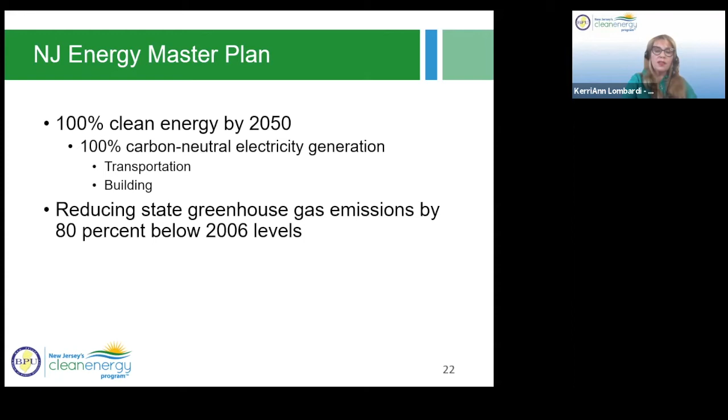So just a bit about the New Jersey Energy Master Plan: it had 7 strategies focusing on transit and building. The goal is to be 100% clean energy by 2050 and reduce state greenhouse gas emissions by 80% below 2006 levels.

And with the new administration, we have a new commitment and ambitious plans for carbon neutrality. President Joe Biden has called climate change an existential threat and has ambitious plans to make the US carbon neutral by 2050.

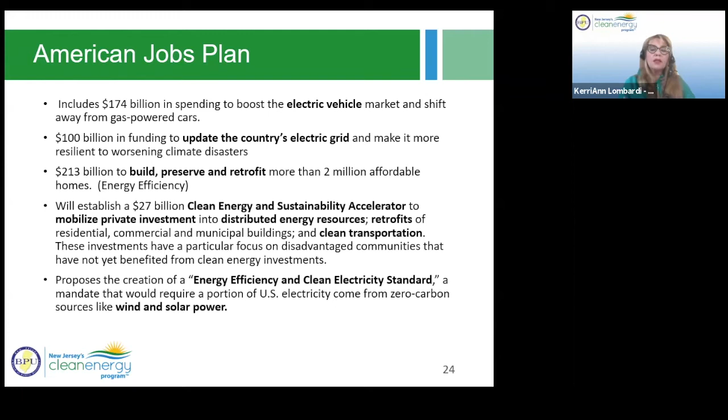We also have the American Jobs Plan. That includes $174 billion in spending to boost the electric vehicle market, $100 billion in funding to update the country's electric grid, $213 billion to build, preserve, and retrofit more than 2 million affordable homes. The American Jobs Plan will also establish a $27 billion clean energy and sustainability accelerator to mobilize private investment into distributed energy resources. So lots of new things coming under the new administration.

There's also the HOPE for HOMES Act and the SAVE Act. These are additional legislative priorities under the Biden administration to aid our energy efficiency improvement goals.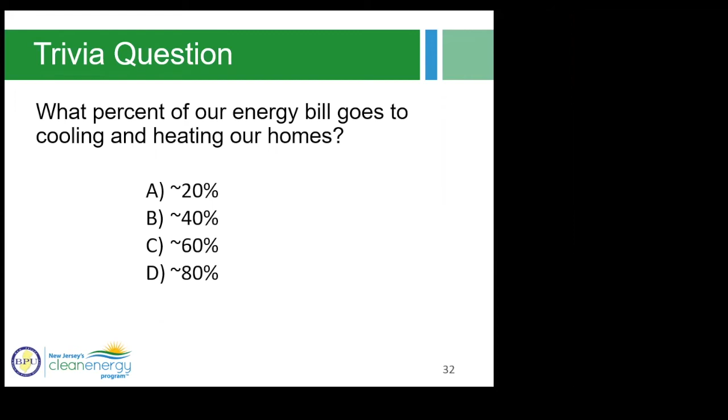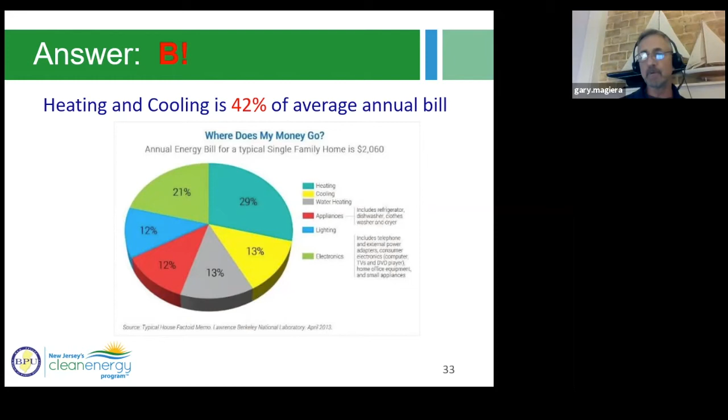Actually, the answer is between B and C. B would be for heating and air conditioning. Now this is not New Jersey, this is nationwide average. C, if you're throwing in domestic hot water, which really should be part of it. So you look at the pie, 29%, 13%, and 13% - that's more than half that pie. If you add 42 to 13, that's 55%. And like I said, that's the average, so you get into extreme north and extreme south, those numbers will go up. But insulation and air sealing - a lot of people talk about insulation.

I was just talking before everyone came on about my friends getting insulation. You get insulation just by itself - insulation doesn't really do anything. It needs to be in a sealed cavity. In an attic, if you don't seal up all the holes underneath the insulation, the air just goes around it. When you go to pick up insulation in your attic, you'll see stains on it. Those stains are actually the air moving through your interior walls in the wintertime. Your house is like a hot air balloon.

And we'll see some pictures in a minute - we'll go to that. But insulation, air sealing, you got drafts. So what do you do? You fix the drafts. The Pink Panther is the pink stuff, the insulation.

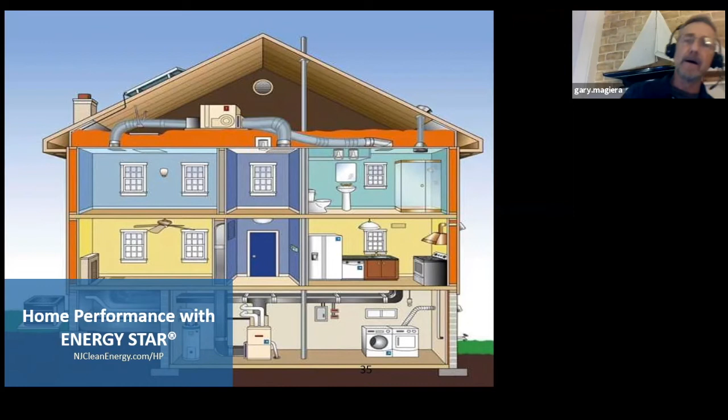Have you been in your attic lately? That's where most of the air is leaking in the house in both summer and winter. So that's a cross section of a house. All those heating ducts, all the penetrations - electrical, plumbing - they're all holes cut in your house. Like I said, up until less than a dozen years ago, most of the new construction in New Jersey, those holes weren't sealed. They just cut holes in the sheetrock, typically much larger than what they needed. Especially plumbers are notorious for that. And air just leaks - so if you don't fix the holes, the air just goes around the insulation.

So getting from here to there, how do we create a clean and sustainable future? We improve the air infiltration on houses. That's a start - that's the cheapest, most economic way to save energy in a home and in commercial buildings too, is to seal up the leaks.

You do that with spray cans - there are professionals in our program that do it. You can go to our website, NJCleanEnergy.com, and find insulation contractors on the home performance list that specialize in this, and there are rebates and incentives for it.

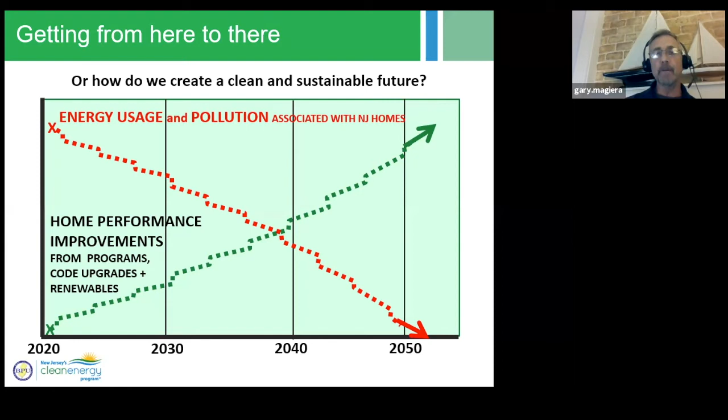That's to start - you air seal, you go around, you pick up the existing insulation and air seal. Typically it's two guys, one day in an attic, put the insulation back. And what they're doing is going for exterior walls and interior partition walls where the sheetrock meets the wood - that's where a majority of your air is leaking, along with the penetrations.

So this is a typical house that doesn't have proper air sealing or insulation. The roof on the left, you can see the snow's melting - could be because of the sun partially, but probably mostly because warm air is moving up through the building from the basement and the first floor into the attic, and it's melting the snow on the roof deck.

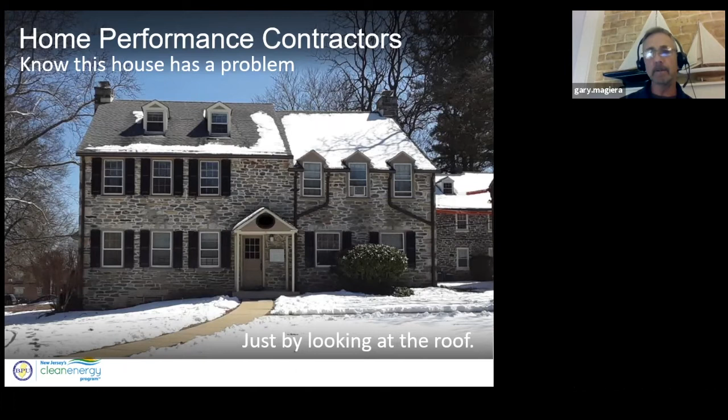So it rises up, comes up through the ceilings below, and condenses in the wintertime. If you have a lot of moisture, it's condensing on the inside of the roof deck and causing mold problems. You'll see a blue powder or white powder sometimes - that's actually mold growing. You should have that checked out.

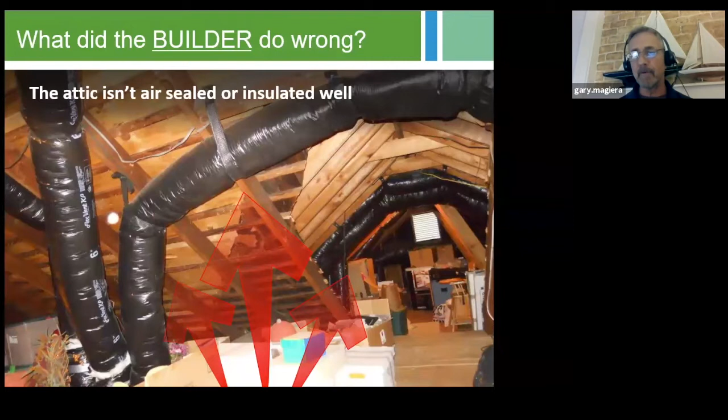My first house was like that. The guy who owned it thought he was doing good - in the wintertime he'd close off the gable vents and seal the attic. Well guess what, he was sealing in all the moisture that was coming up from the first floor. So make sure those vents are open.

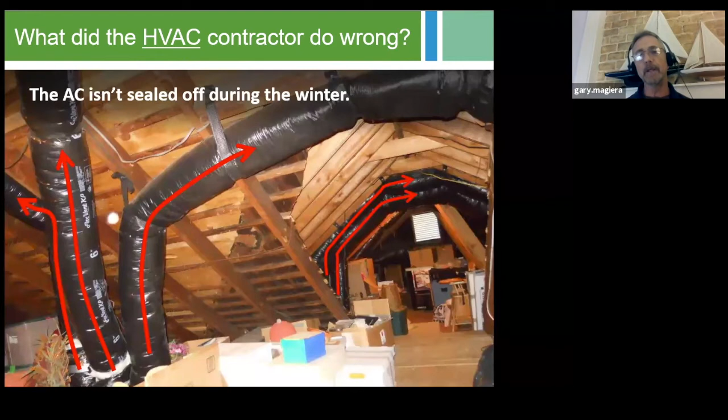Another thing is probably the vents - the ducts are not sealed, which typically up until 3 years ago in new construction you didn't have to seal the ductwork. Now new construction, you need to seal the ductwork when you're building a new home. There's 20, 30, 40% air leakage in a typical air duct system. You have to size your air conditioner, your furnace larger just because you're leaking all the air - it doesn't make any sense. So there's a typical attic showing air leaks.

And so our program contractor, you can get a home assessment done. Some of the contractors will do this. We're going to show a little video here.

In any, I'm going to pause for a second.

The gas utilities offer energy audits at a reduced price. It's subsidized through the program. And when we get into the transition, like Keri Ann was talking about, all the utilities should be offering energy audits. They won't be for free, there will be a reduced cost, like I mentioned. That's the first step, get an energy audit done on your home to do the analysis.

Typically a house that's more than, say, 15-20 years old is a good candidate - a lower efficiency furnace, lower efficiency air conditioner, air leaks, not enough insulation in the attic. Those are typical homes that would qualify for the program, but you need a contractor to come out and give you that analysis first, and then you could have the assessment done. I think New Jersey Natural Gas offers it for like $49 or $59. It's a $500 job for a contractor to come out for 3-4 hours and do an analysis on your house.

So take advantage of that, find out how leaky your house is, and they'll make recommendations, and then you can take it from there. There's a list of contractors on our website. There's about, Keri Ann, what is it, about 90? We have about 90 home performance contractors in our program.

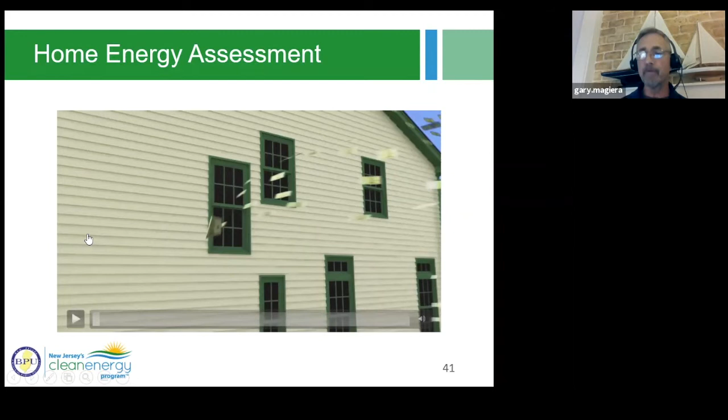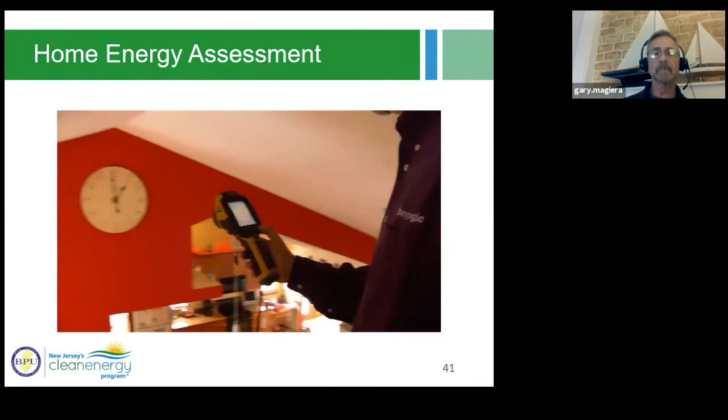A leaky home costs money. How do you stop it? It starts with a comprehensive home energy checkup - a series of tests and inspections to find out where your house could be more efficient. The end goal is to save energy, save money, and make your house more comfortable. Installing energy-efficient lighting and appliances will help, so will creating a sealed barrier around your house, kind of like putting a blanket around the outside, minimizing the leaks. Upgrading your home to save energy can put anywhere from 5 to 30% of your energy bill back in your pocket.

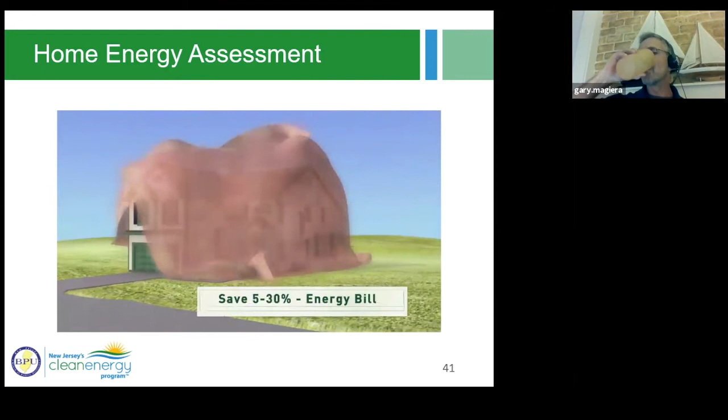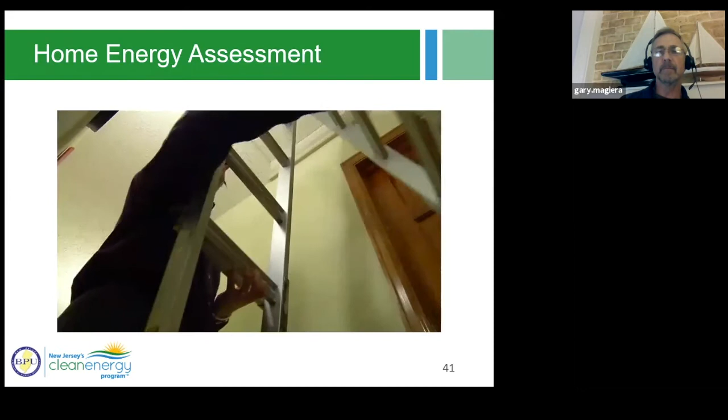To get a thorough home energy checkup, you'll need some help from a professional. Look for a home energy technician called an auditor in your area. In this cold weather evaluation, the auditor starts on the outside, looking for problems around walls, joints, and under the eaves. If there's not a tight fit, you're losing energy and money. Next, the technician might head up to your attic to check for leaks on the top of your home barrier. That trap door could be a culprit, letting cold air pass into the house.

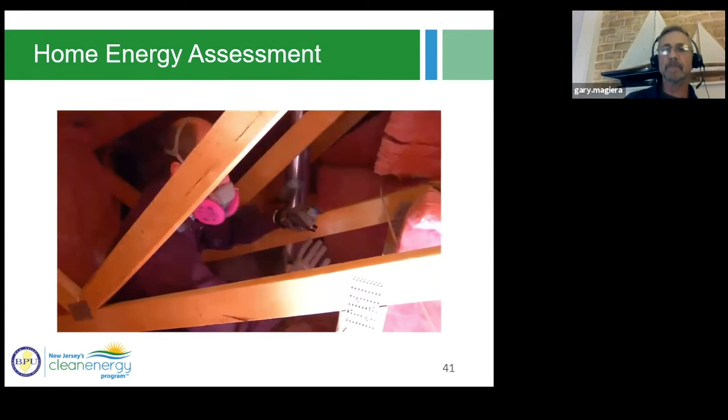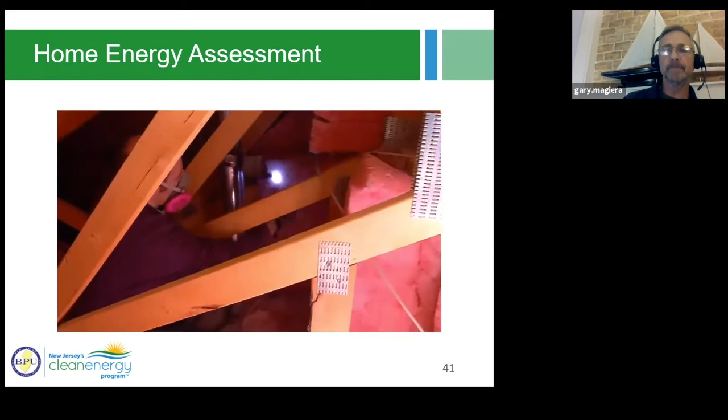A big part of the checkup is determining how well the insulation insulates. Insulation should be correctly installed in between all areas of the house frame. That means it needs to be evenly applied and not just jammed into spaces. And of course, if the insulation has fallen down, it's not working. Your energy auditor will inspect the holes where electrical lines pass through. If they're not sealed, they're leaking.

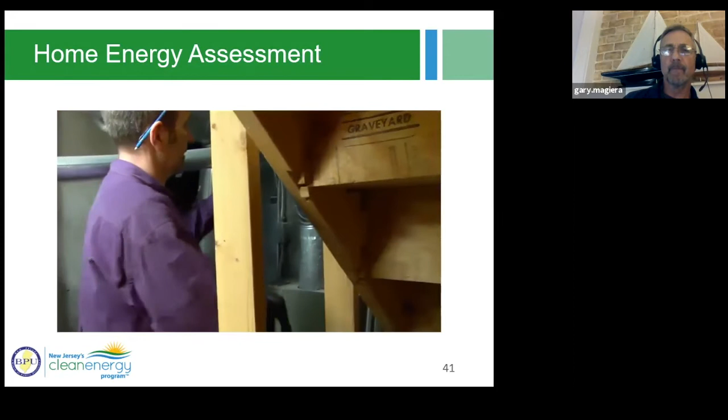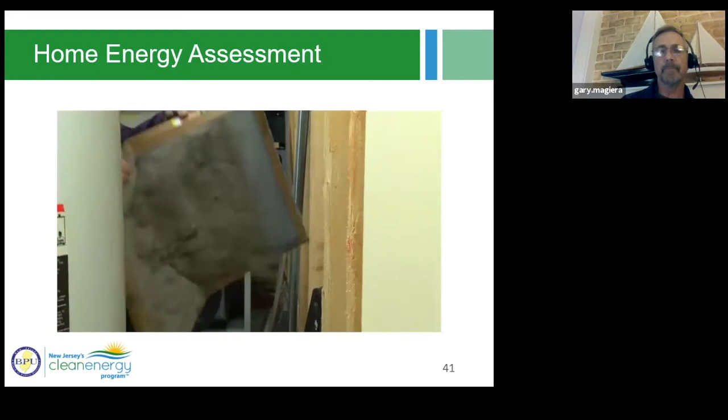Then it's down to the basement. Your furnace and water heater could be wasting energy. The auditor will check to see how energy efficient the furnace is. Furnaces generally lose efficiency as they get older, and it could cost you more to keep yours running than to replace it with a new one. Maybe all you need is a new filter. Some people haven't changed their filter for months, even years. That gunk clogging the filter means your furnace has to work harder to heat your home.

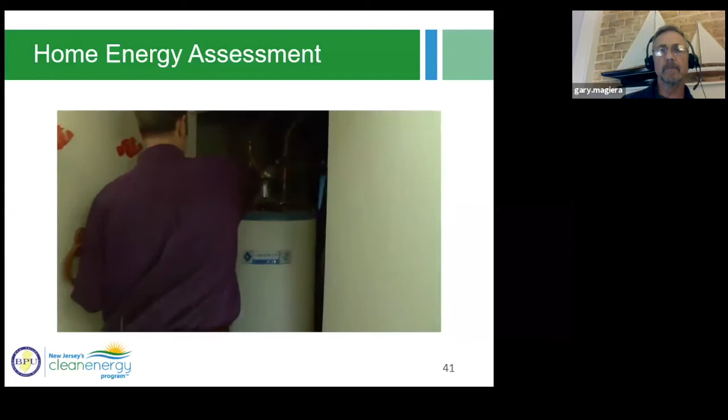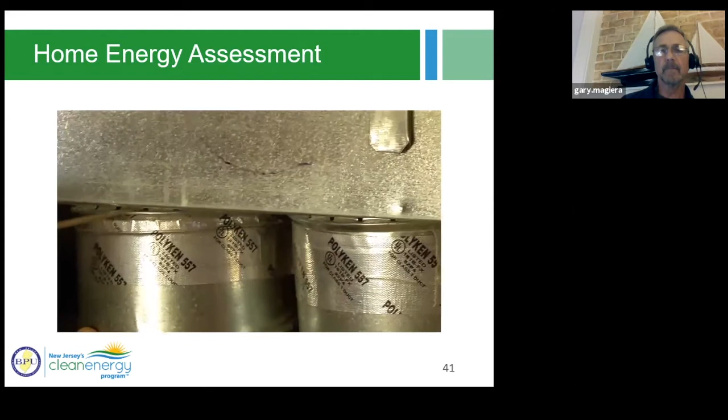If the water heater is several years old, it may not be efficient, and if it isn't insulated, it's also losing energy. Now it's on to the ductwork. The technician will inspect connections to make sure they make a tight fit. They have to be sealed to keep the warm air going where it's supposed to go. If the screwdriver can go in the hole, it means one thing for sure: money is going out.

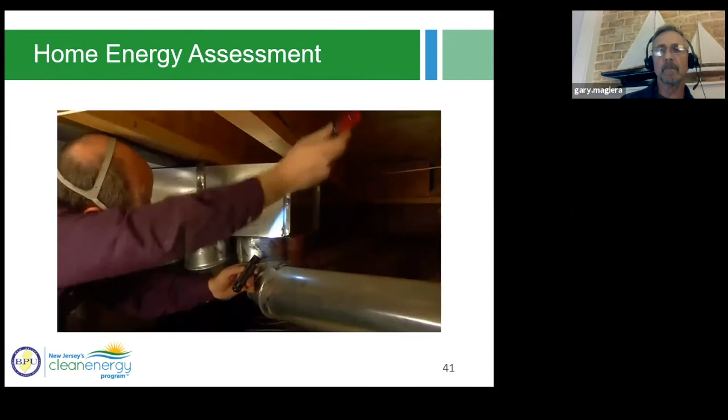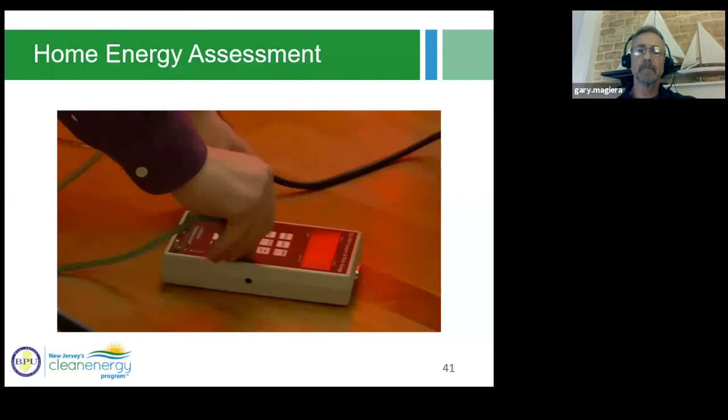Now for the blower door test. The energy auditor will close all the windows and doors and anything else that lets outside air in. This special fan will depressurize the home. The idea is to suck air out of the house, allowing outside air to rush into the home through all those openings you didn't know about.

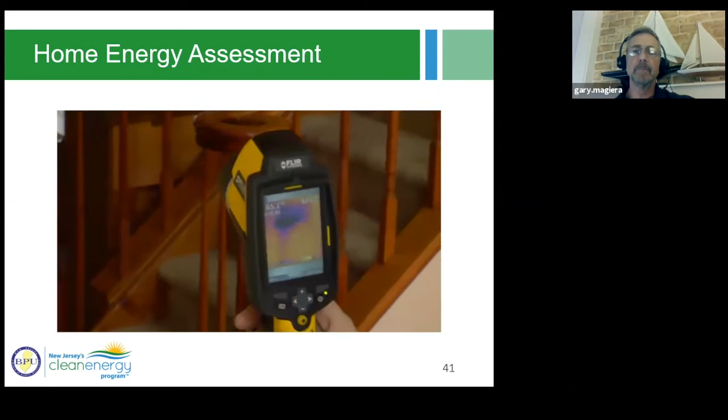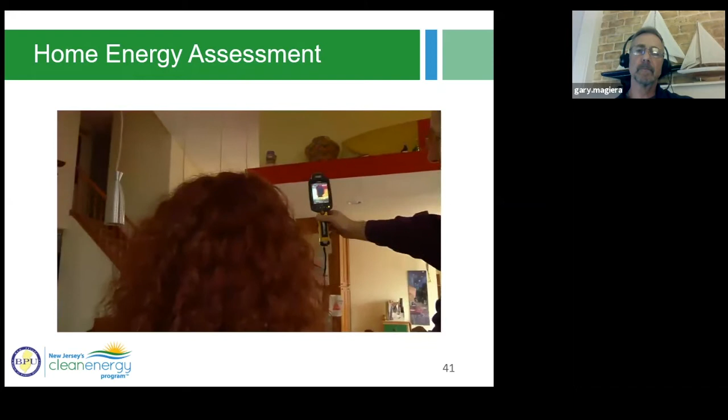With the windows and doors closed and the fan running, leaks are easy to spot with an infrared camera. In winter, the auditor will scan the interior of the home looking for cold air rushing in. Here, the darker the color, the worse it is. These black spots mean one big air leak. It's an eye-opening experience. For this house, the recessed lighting fixtures are big problems. The auditor will also take a look at the kinds of light bulbs in those fixtures. If they're incandescents, they're using a lot of energy. Warm, compact fluorescents are an energy-saving alternative.

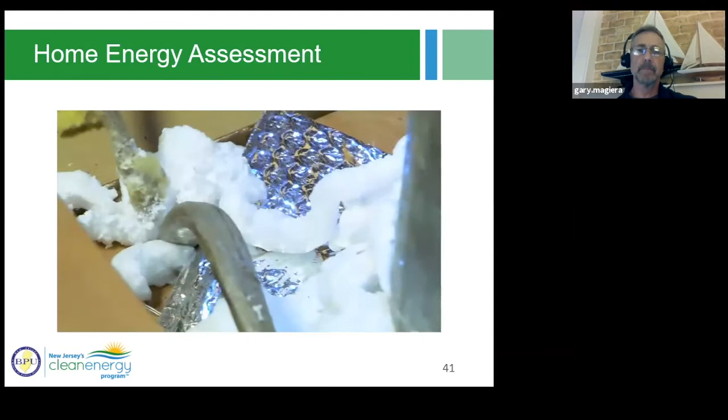So the home energy assessment reveals ways that energy escapes your home, costing you money. The good news is, you'll have a comprehensive home energy report showing which efficiency upgrades are right for you and where to stop those pesky leaks.

All right, so the actual punchline I never got to about solar was, you want to reduce the amount of energy the building's using. So instead of needing 20 panels on the roof, you could possibly get away with 15 or 16. The solar guy may not like to hear that, but it's the truth.

Not only that, you're just wasting it. One of my neighbors is like that. He's got a hot tub, he's got all these things going on, and I told him, have your house sealed up. He thinks it's great because he's got panels on the roof, but I told him you can be sending more electric back into the grid and getting paid for it if your house uses less energy. So it's just common sense.

And the rebates are tremendous, probably the largest in the nation. A lot of contractors complain about the program, but then I tell them, go to another state, you'll get almost nothing. New Jersey offers a lot of money, rebates and interest-free loans. We'll talk about that in a minute.

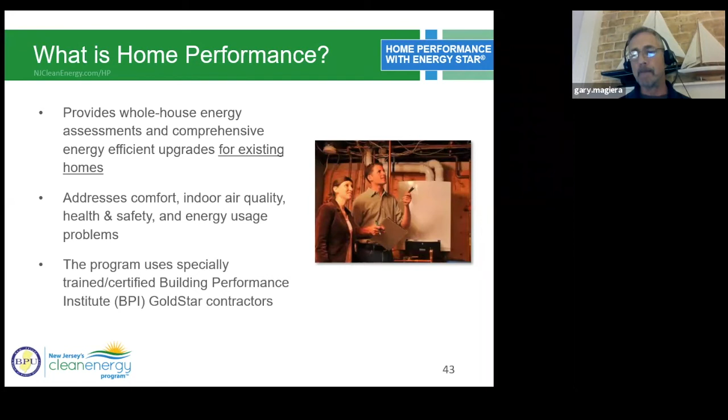So some of the benefits, as we talked about a little at the start, when you're sealing up your house, you're reducing the amount of dust and allergens. You're eliminating the stuff that comes up through your basement and crawl space - maybe not totally, but you're slowing it down. In older homes, you'll typically never stop the air from coming in, and you need fresh air. So what these guys do, the contractors test the house.

They do an air infiltration test, like you saw in the video, before the job starts. They do the air sealing and insulation, and then come back at the end and do another air infiltration test to show the reduction in air leaking into the house. They're also checking to make sure there's enough fresh air coming in - there's a code for that, I think it's 0.35 air changes per hour.

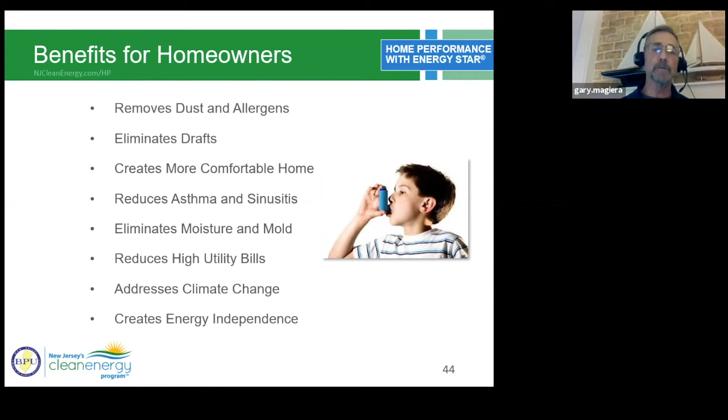The only time I've seen an older home get too tight is when the contractor is using spray foam, and typically that's when you're ripping off the sheetrock and basically gutting the house.

So it's going to make your house more comfortable, with more even temperatures room to room. You're going to size your furnace and air conditioner properly. Most people don't realize most furnaces and air conditioners are oversized. I've been in thousands of houses and done Manual J calculations, and you'd be amazed - you go from a 100,000 BTU furnace put in 1978 to a 40,000 BTU furnace that's 95-98% efficient, multi-stage, very quiet, with an ECM variable speed motor that uses very little electricity compared to a standard motor.

The results are amazing, and when I first started getting into it, it was hard to believe you can actually reduce the size of the equipment. It's all done on computer software now, not on a piece of paper like in the old days - rule of thumb, they wouldn't even measure a house. They'd say, oh yeah, I did a house down the street and it was a 3-ton, 100,000 BTUs.

You've got to do the calculations. It's actually code now when you replace equipment in the state of New Jersey - it's not like-for-like anymore. Just because you had a 100,000 BTU furnace 30 years ago doesn't mean you need a 100,000 BTU furnace now.

The contractor's got to measure the house, run it through the calculations, see how much insulation you have, what type of windows. A lot of houses' windows have been upgraded, more insulation has been added, and the air duct system has been sealed up, so the house is using less energy. And like I said, most systems are oversized to begin with, and they don't run properly.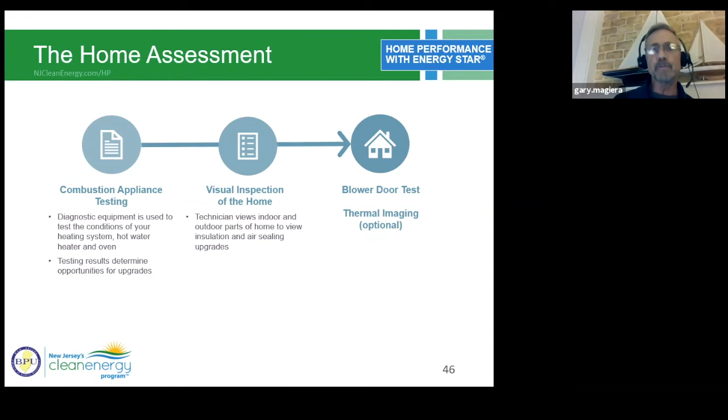Some of the contractors use smoke pencils, so as the air is leaking in, you can actually hold the smoke pencil up and see the smoke blowing. It's incredible.

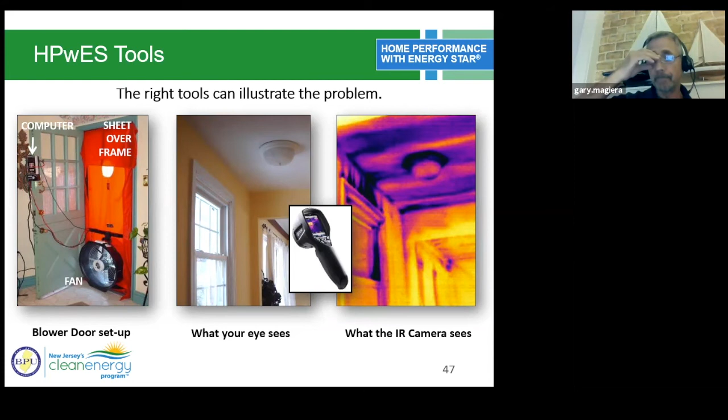The incentives for the program are up to $4,000 for a house that reaches the 25% energy savings level. The contractor receives free software from the program, we teach the contractor how to use it, and the program inspects the contractor's work. No one gets paid until the contractor's work is inspected by the program.

The loans are up to $10,000 at 0% interest. Typically, that $10,000 would be for say a boiler or furnace, air sealing, and insulation, which is mandatory - you need to start with air sealing and insulation, then go to the heating system, and then sometimes you can throw in the air conditioning system. So those jobs might range anywhere from $15,000 to $20,000 for a single zone - say a ranch house or a 2-story colonial, one furnace, one air conditioner.

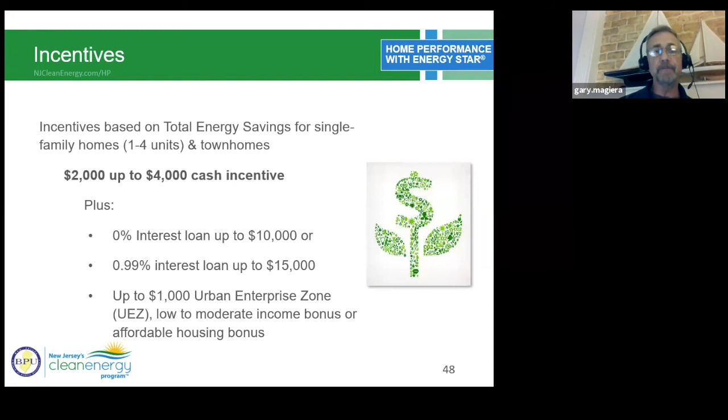The loans, like I said, are $10,000 at 0%, 7 years. If you have a larger project, the loans are up to $15,000 at 0.99% interest.

There's a program for multifamily projects - we have some contractors that specialize in multifamily homes. Condos don't qualify for this, it's only townhouses. The reason condos don't is because the attic is owned by the association. In a townhouse, you own the attic, so you need to live in a building where you own the attic and the basement. But it could be 3 stories or less. We've done a lot of townhouses.

And we're going to watch a video of a homeowner that went through the program. So here we go, Keri Ann is narrating here. Take it away, Keri Ann.

Hi everyone, I'm Keri Ann Lombardi from New Jersey's Clean Energy Program. I'm here with Peggy from Manchester, New Jersey, who recently had an energy assessment done on her home. So Peggy, can you tell us what it is that made you decide to get an energy assessment? Sure, I have been involved in energy efficiency for a long time, and I really believe that making a house as tight and efficient as possible is the best way to save energy. My house is a completely electric home, and it's very important to save energy that way.

So what kind of comfort or other issues were you trying to address with the assessment? So by tightening up the house, it will reduce the drafts, and the ventilation is better. So those are the other things I was looking for, besides reducing my cost of my bill.

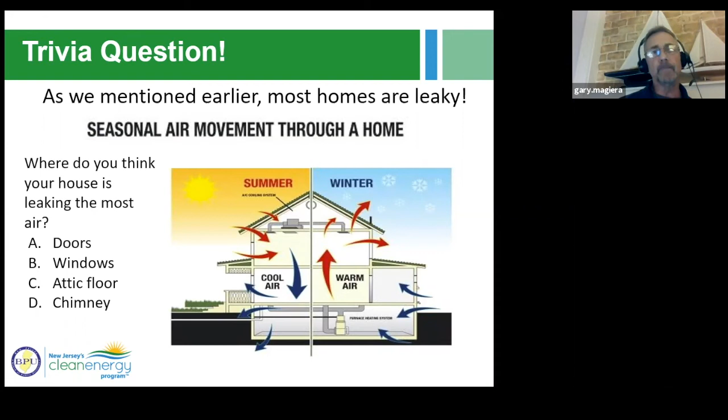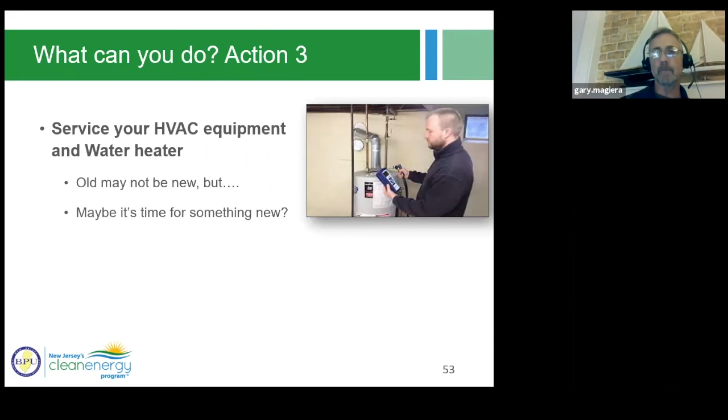So as we mentioned, most houses are leaky. Where do you think your house is leaking the most? Like I said, it's the attic, the floor of the attic, or the ceiling on the top floor. So what can you do? You can have your equipment serviced regularly, change your filters. This is all minor, common sense stuff.

Water heater - you can wrap your water heater in some instances. These are now the Warm Cool Advantage program, what we call the HVAC program. It's changing out individual pieces of equipment. Right now, the only loans available are through the gas companies.

The electric utilities aren't offering that, but that might change during the transition. But they've doubled the rebates on heat pumps.

I don't know if you're familiar with heat pumps. Back in the 70s and early 80s, during the gas crisis, they got a bad name. Heat pump technology was in its infancy back then, and honestly, most of the contractors that put them in didn't know how to install them. They weren't familiar with them, and they didn't size them right. A lot of them were set up on electric backup, so when the temperature hit 40-45 degrees, the thing would go to straight resistance heat and your meter would spin.

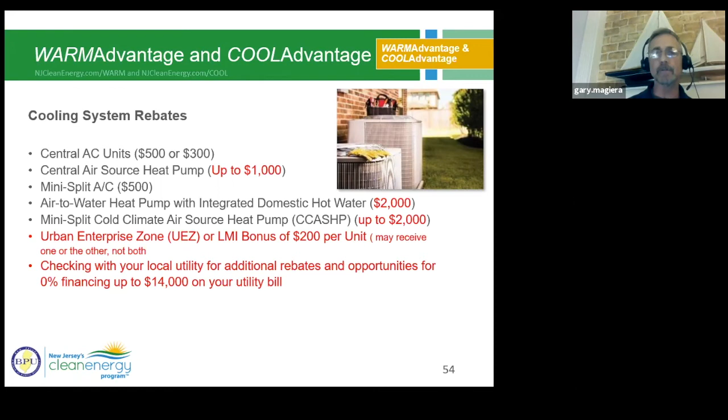They're very, very different now, especially the ones called cold climate heat pumps or ductless mini splits. We'll talk about that in a second. I'm sure you've seen these - they're very common now, not only in commercial buildings but in residential usage. The contractors are selling these like hotcakes because of the incentives.

So for a single zone system, one head on the inside and one outdoor unit, if it meets these efficiency ratings, this particular unit can heat your house down to 5 degrees outside without electric backup. It's incredible - the compressor technology has come so much further than the 1970s and 1980s. For a system that meets these efficiency ratings, it's a $1,000 rebate.

If you have a two-headed system - I don't think we're showing one here, but if you have a two-headed system with 2 indoor heads or more, that gets a $2,000 rebate. Some of the contractors are saying it pays for the upgrade to go from a standard unit to a cold climate heat pump. So check those out.

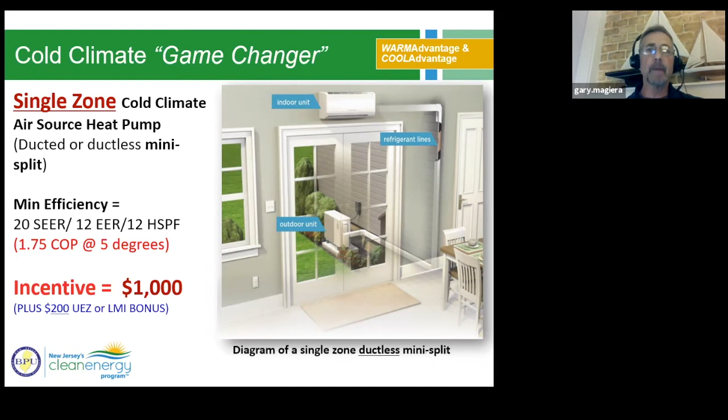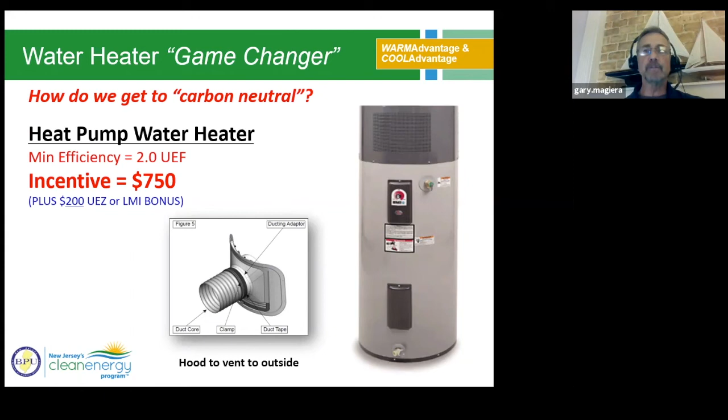These are rebates on high efficiency furnaces and boilers, water heaters. This is a heat pump water heater. Actually, this is starting to become more popular.

Residential bonus incentives - there are incentives for low-moderate income and also urban enterprise zones. These are extra incentives on top of the rebates that are available. You have to qualify for these. You can go to our website if you want to check this out - we have information on how to contact people and see if you do qualify for these.

For low-moderate income, I think a family of 4 can earn up to close to $105,000 and qualify. They do need to see a copy of your previous year's tax return, and that's usually sent into the institution doing the review. The review process just takes a couple days. Like I said, you can go to our website to get more information on that.

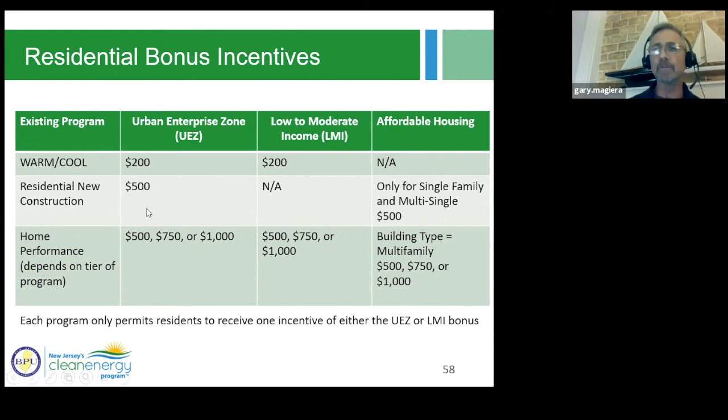And then there's some bonuses - I should say extra incentives - for affordable housing.

What can you do to reduce your energy usage? You can do simple things, as little as change out your thermostat. Some of the utilities are offering thermostats like the Nest at reduced costs. I think New Jersey Natural Gas was offering it for something like $100 not too long ago. To buy these, they're $300-400 items, and I think they'll install it for you too. You can check with the utilities on this - you'll usually see these offers in some of your bill inserts.

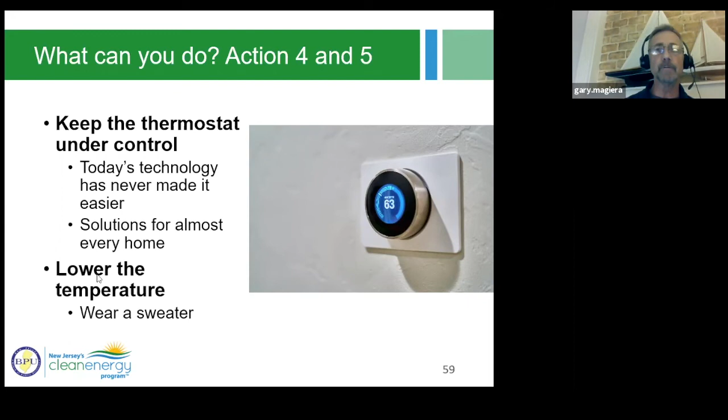Wash clothes at 30 degrees. Most laundry detergents now let you wash your clothes in colder water. And dryers have sensors in them now - when they dry clothes, they operate on a sensor, so when the clothes are dry, the unit shuts off. It doesn't keep running. Or you could hang your clothes outside like my mother used to do on the line.

That was fun. I used to go out there and have to take the clothes off the clothesline. That was one of my jobs growing up.

Switch to LED lights - they're much more efficient than compact fluorescents. They're safer, they don't contain mercury. You turn these on, even when the weather's cold, they're instant on, not like the compact fluorescents that used to take sometimes minutes. You could go out for a cup of coffee, come back, and the thing still wouldn't be warmed up, if you had it in an outside fixture or in a garage.

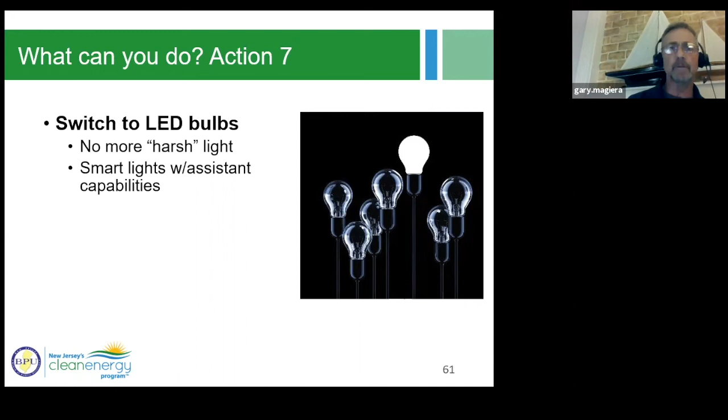So check out the LEDs. We sponsor a program where the LEDs can be bought at reduced costs. You can go to the home centers and check it out - usually you'll see the New Jersey Clean Energy sign with some of the reduced costs. The bulbs are being subsidized through the program.

There are appliance rebates. We have a team of appliance people that go out to the home centers and teach the salespeople how to sell energy efficient appliances and qualify the appliances for the rebates. I hear a lot from homeowners - they buy the piece of equipment and then ask if there's a rebate for it. What they should be doing is asking the salesperson which units qualify for the rebates first. So even dehumidifiers now, room air conditioners - there are rebates for those.

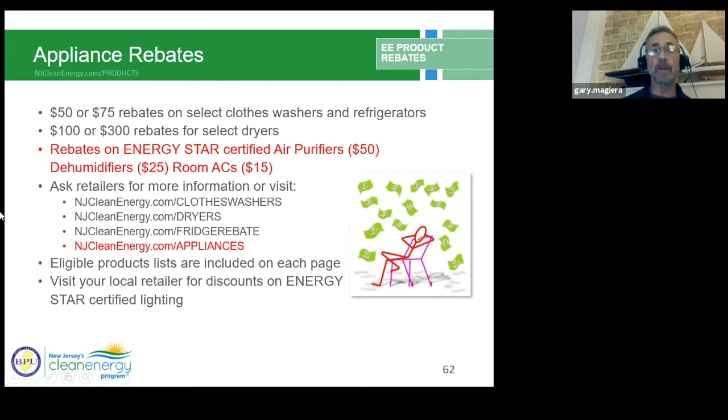Appliance recycling is a big program. You can schedule your old, inefficient refrigerator or freezer to be picked up through our website calendar. Right now during COVID, we're not going into houses like before, so the refrigerator or freezer needs to be put out at the curb, but you can schedule that. We'll pick it up and send you a check for $50 each, so if you have 2 refrigerators, it's 2 times $50.

In addition, we'll pick up old room air conditioners or dehumidifiers, and there's a $25 rebate for those. The key is they need to be picked up along with the freezer or refrigerator. They won't come out for just a window air conditioner or dehumidifier, so you can schedule those together.

The good thing is the appliances are recycled. In some cases, the refrigerators and freezers that can be repaired are donated to Habitat for Humanity.

More actions: curtains. The sun is your friend in wintertime, but in summertime you close the curtains so the heat doesn't come in. You'll see a dramatic change in the amount of heat coming into your rooms if you close the curtains. Also, avoid leaving appliances on standby.

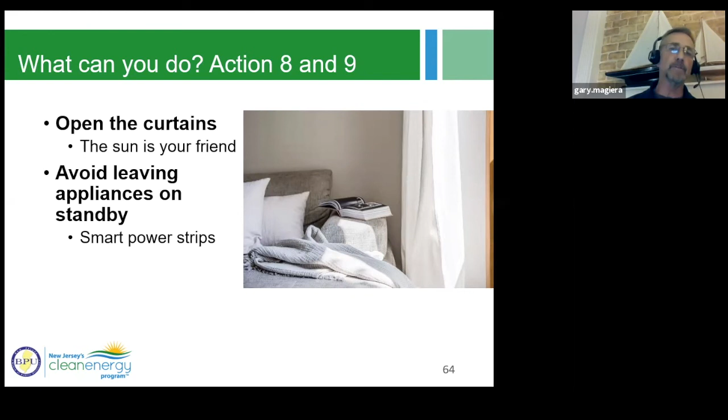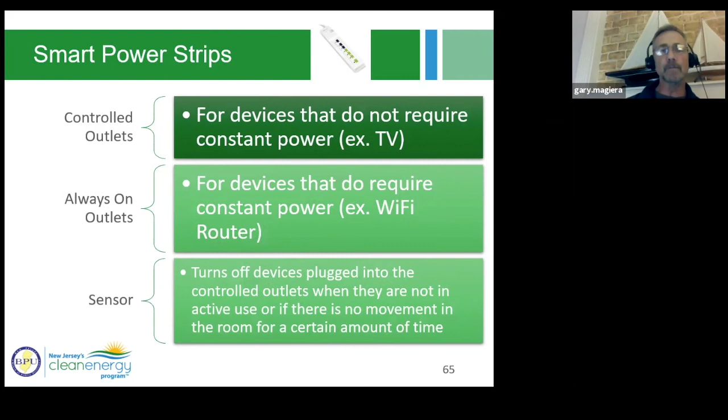Smart power strips, you can see these at some of the home centers. They've got sensors in them.

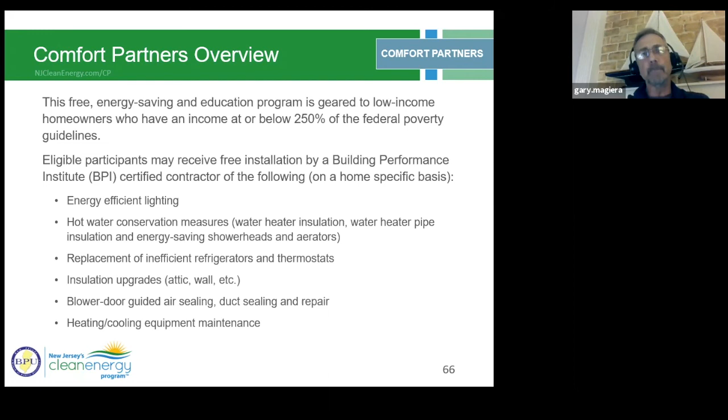Comfort Partners program is an income-based program. You can check that out on our website. Sometimes you'll see bill inserts from the utilities about this program.

We also have the Clean Energy Center on our website. You can check that out. There are a lot of good educational tools on there, and some courses and videos.

Trivia question: which of the residential programs offers up to a $4,000 rebate and 0% financing up to 7 years? Let's see who's paying attention.

You can put that in the box. Oh, Keri Ann, chat box. Let's see if anybody guesses. You have to show them the options, Gary. Ah, click through that. There we go. All right, there we go.

So what do you all think? Very good, we're getting some guesses here. We're getting some D's. Couple of D's. An A and a D. I want to hedge my bets here. All right, 5, 4, 3, 2. There's one B.

So the answer is the Home Performance Program, which, like I mentioned, is going to be known as the Existing Homes Program. Check that out, it'll be run through the individual utilities. It shouldn't change that much. Stay in contact with us about some of the changes during the transition. We should know more in probably 2, 3, 4 weeks, and you'll see that information on our website, along with our contact info.